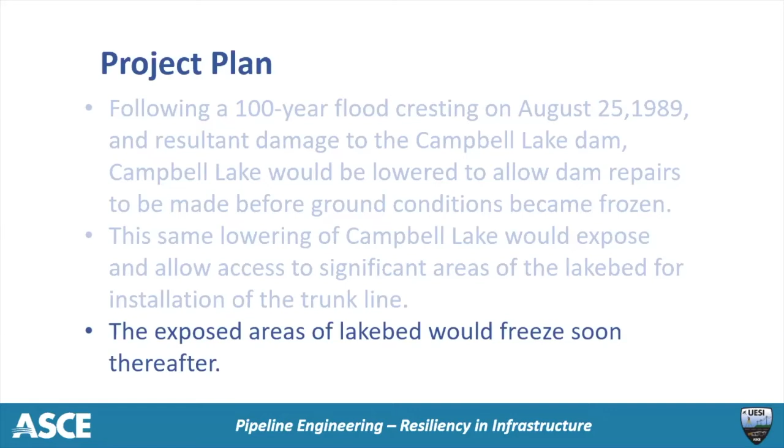That same lowering of Campbell Lake would expose and allow access to significant areas of the lake bed for installation of the gravity sewer trunk line. The exposed areas of the lake bed would soon freeze thereafter. And while that lake bed area was frozen, the route of the trunk line would be trenched to a gravity flow grade. The bottom of the trench would extend to a depth as great as 22 feet below the lake bed. That's important because if this had not occurred, a force main would have had to be built instead of a gravity flow job, a gravity sewer project.

And a force main would have been much more expensive to not only construct, but also to operate in the decades to come. So after the trench is dug to grade, the bottom of the trench would be backfilled with an aggregate base to further stabilize it and further guarantee the proper grade. And then unrestrained 48-inch diameter push-on joint ductile iron pipe wrapped in polyethylene encasement would be installed to grade for the gravity flow trunk line.

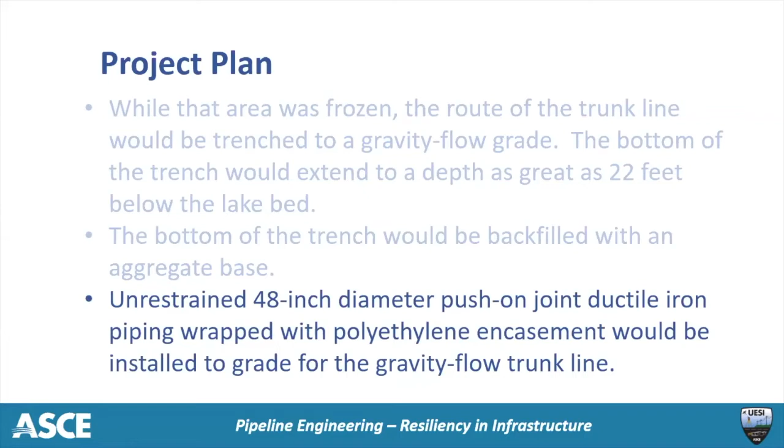That 48-inch diameter unrestrained push-on joint ductile iron pipe would be outfitted with concrete collars atop the pipe to resist buoyant forces. 48-inch diameter ductile iron pipe is going to have 507 pounds per foot of buoyant forces if the pipeline is empty. That's 10,000 pounds per 20-foot length of pipe. Significant buoyant forces inside a partially filled ductile iron pipe under the water.

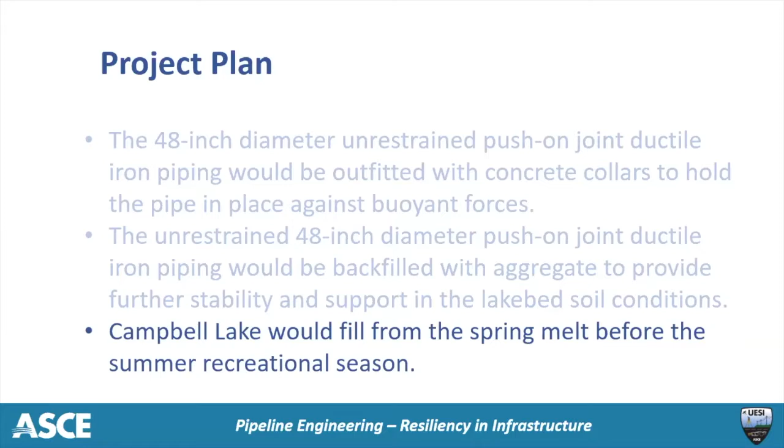The unrestrained 48-inch diameter push-on joint ductile iron pipe would then be backfilled with aggregate to provide further stability and support in the lake bed soil conditions. And then finally, Campbell Lake would fill from the spring melt before the summer recreational season. The job bid on November 1st, 1989. I was there.

I still have my notes from the bid. And it was a real trip down memory lane to dig those out of the file cabinet and be able to help prepare this paper. Beta Construction from Seattle was the low bidder at $3,716,000. The engineer's estimate was $4,900,000. The high bid was $5,434,000. So the engineer was about in the middle of the pack, which is probably where he wants to be.

Fast forward 29 years to November 30th, 2018. A magnitude 7.1 earthquake struck the area. The pipeline laid to grade with concrete collars atop it inside an aggregate-filled trench was disturbed. The concrete collars were shaken off, and the buoyant forces pulled the pipeline up. The greatest deflected joint was deflected 14 degrees. It was also 14 feet above its original grade position, and a 16-inch thick ice layer held it in place

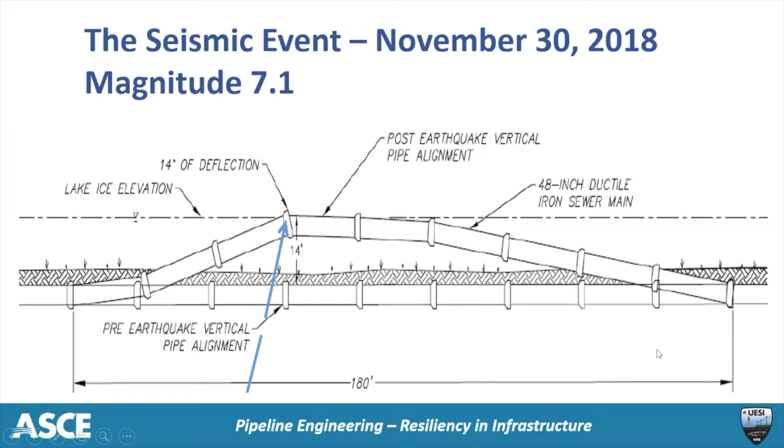undetected. The force main, the gravity sewer line continued to operate, obviously being completely filled upstream and then spilling over that elevated joint. So fast forward 104 days later to March 14th, the ice had melted enough that the buoyant forces allowed the pipeline to push through the ice like a surfacing submarine. And boy, did that get some folks' attention, and they started scrambling.

They quickly put together this strong back assembly, drove it into the lake bed to stabilize the pipe, to hold the joints together so they wouldn't separate when the ice was completely melted. And then they developed plans to further restore the project. And again, that's a presentation by William O'Malley at 12:30 in Track A later today, and I invite you to join in for that.

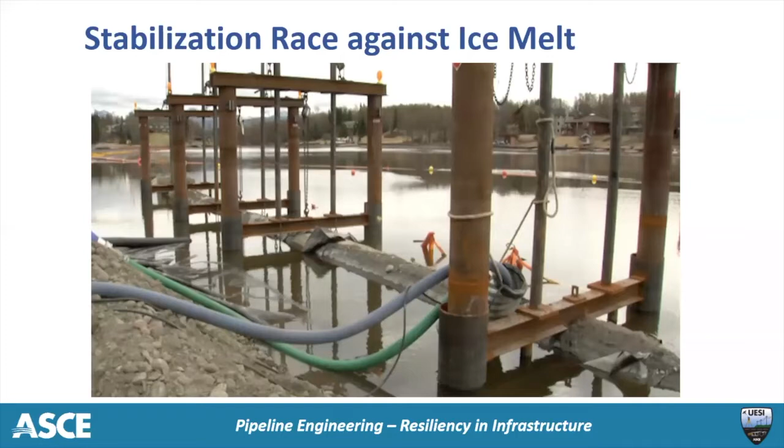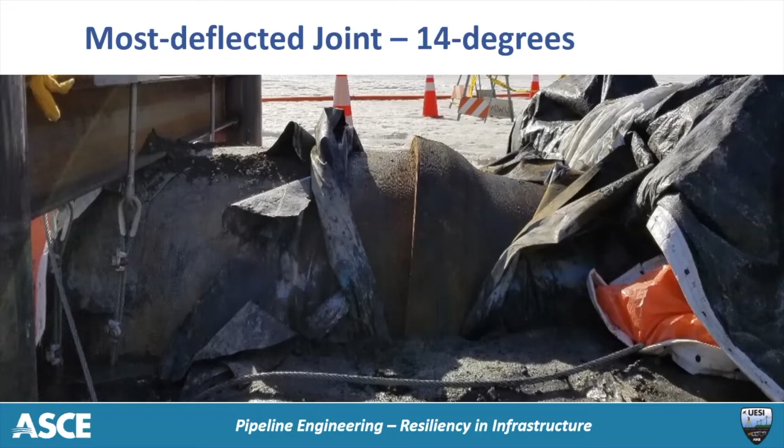Okay, the most deflected joint, 14 degrees. These joints have a 9-inch socket depth. About 6 inches of that spigot is exposed here in this grossly deflected view. You see the loose polyethylene encasement that was pulled back to expose this joint. You see the excellent condition of the pipe surface. This is the American Fastite joint in straight alignment. It's the joint that was used for this project.

The other brand of push-on joints for ductile iron pipe is called Tyton. They both use a dual durometer gasket. In the Fastite brand, that left-hand portion of the gasket is the higher durometer. It's inside a square socket groove that holds the gasket in place, and the wider part to the right, which is thicker and fatter, is the softer durometer, and that's where the bottle-tight, watertight joint is made.

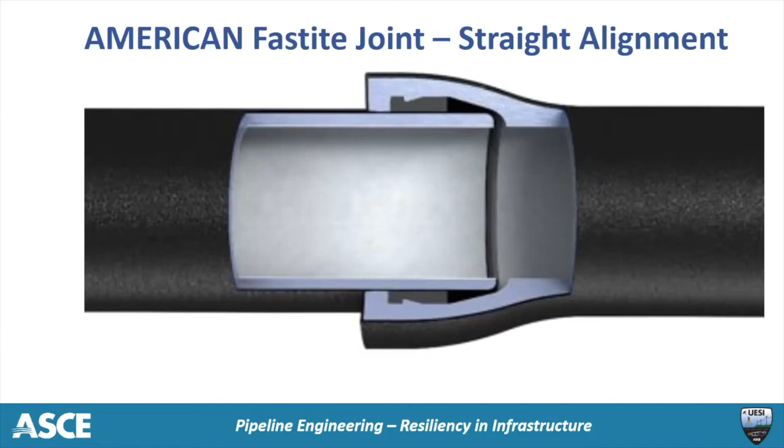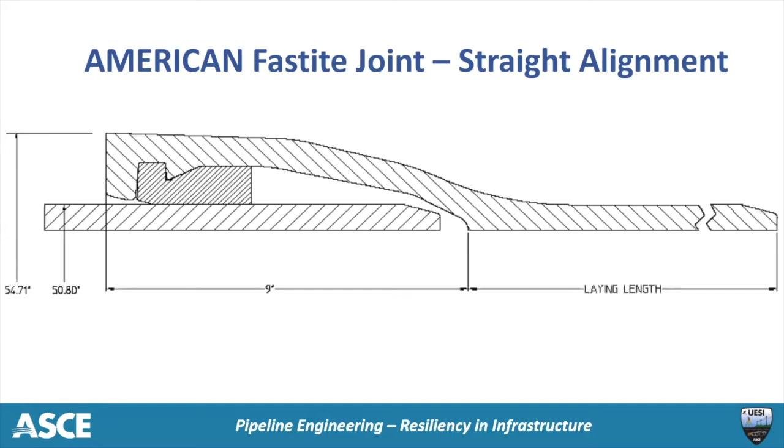This is the special deflection Fastite joint. The regular deflection Fastite joint in 48-inch allows 3 degrees design deflection, 12 inches offset. Because this project is remote, because it would take an awfully long time to ship any specially made joints to the job site, special deflection bells were machined, providing an extra degree of deflection, an additional 5 inches of vertical offset for each 20-foot length of pipe. And this is an engineer's drawing of the 4-degree design deflection.

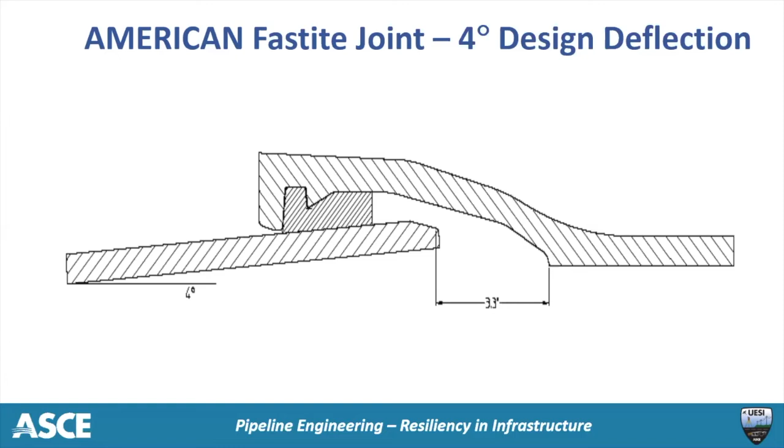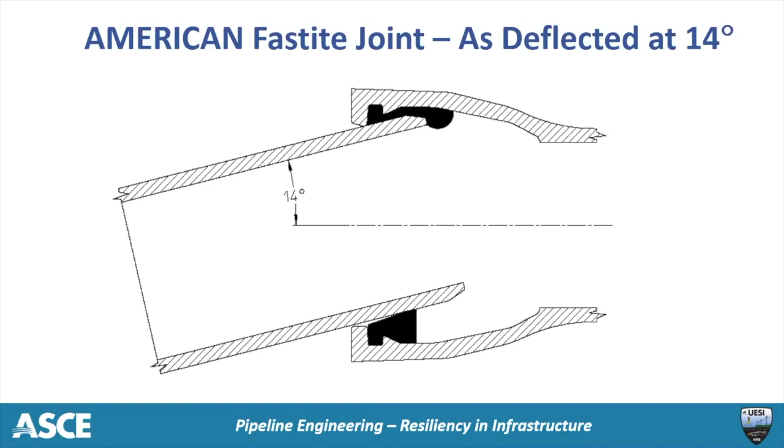This is the 14 degrees as deflected after the earthquake. This reminds me of what an X-ray of an almost broken leg might look like. It can be quite stunning when you first see this and see how much of the spigot has pulled out, and yet the gasket continued to stay in place. The spigot did not fully separate. The joint continued to perform and did not leak.

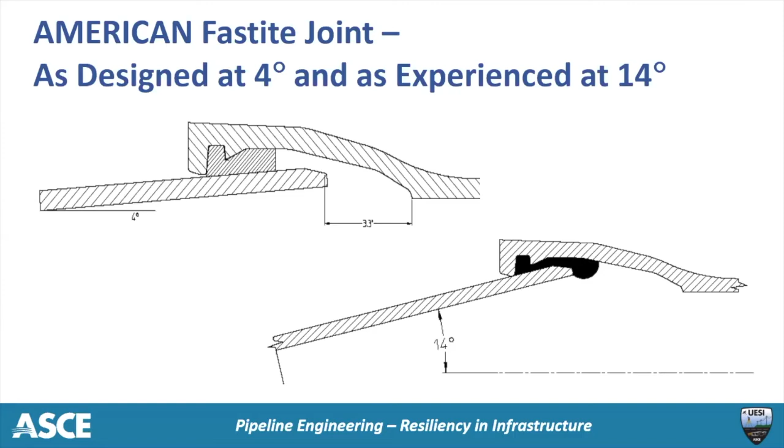This is a side-by-side view showing the 4-degree special deflection bell on the top left and the 14-degree as experienced deflection on the right. A dramatic comparison of resilience of performance outside of design conditions. So let's look here at a little project history.

It's 3,337 miles from Birmingham, Alabama, where this pipe was manufactured, to Anchorage, Alaska. The pipe would move by piggyback trailers loaded on rail cars from Birmingham to Vancouver. Those piggyback trailers would then be transloaded to barges and moved up the Alaska inland passage to Anchorage. And those piggyback trailers would then be offloaded from the barges and trucked to the job site at Campbell Lake. The first shipment was made December 14th, 1989.

The freight cost for the piggyback barge truck combination was a total of $185 per ton. That's $609 per 20-foot length of pipe. That's $30.45 per foot. The delivered pipe price was $110 per foot. So freight was 28% of that total delivered cost.

And at $110 a foot for the 8,432 foot long project, the pipe material cost $927,520, and that's 25% of the $3,716,000 construction cost. Quite a bargain, if I may say so.

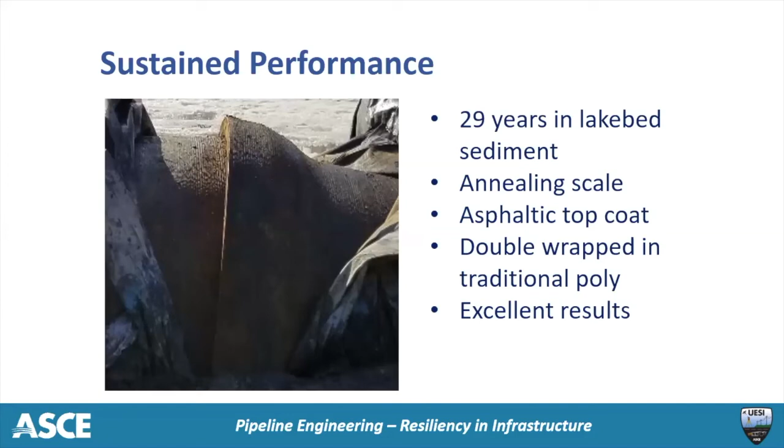So what if this project were designed today? How might it be designed differently? What advancements have occurred in ductile iron pipe technology that might be employed today? I would expect the flex ring joint would be used instead of the unrestrained Fastite joint. That would include the same Fastite gasket with dual durometer and bottle tight sealing.

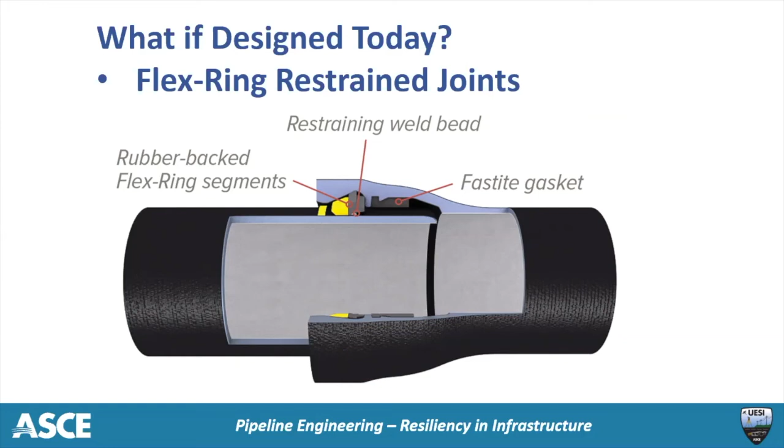It would include a restraining weld bead on the spigot that would engage with a rubber backed assembly with locking segments to prevent joint separation, and it would still allow joint flexibility. This is a remarkable combination of joint performance. An even more remarkable combination of joint performance are seismic joints.

This particular design includes 8 degrees deflection, 3 degrees on the left-hand side of that red casting, and 5 degrees on the right-hand side of that red casting. It includes tremendous end-wise thrust resistance and thrust capacity, yet it also includes longitudinal expansion and contraction, 2.4 inches each expansion or contraction, for a total range of motion of 4.8 inches if you go all one way instead of splitting the difference.

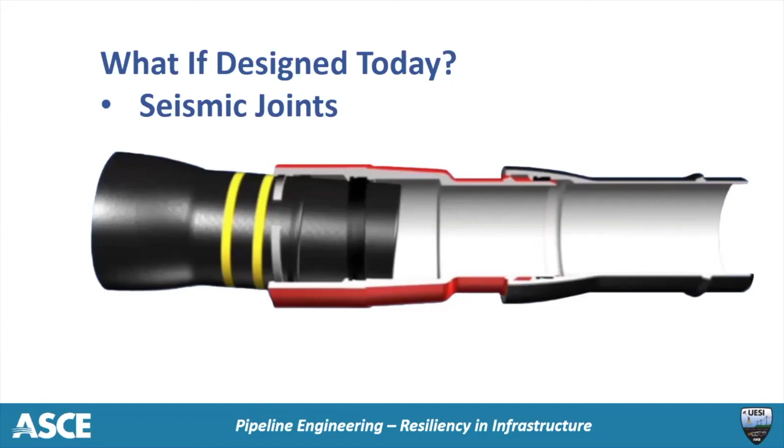I would expect if it were designed today, it would also include zinc coating, and it would probably also include V-Bio enhanced polyethylene encasement instead of traditional polyethylene encasement, which was the only thing available at the time this project was constructed.

Now, I have recently completed a presentation to the NACE Corrosion Conference that studied a zinc-coated V-Bio polyethylene encasement study in the Everglades, and the samples were monitored even after intentional damage to the wrap and the coating, and the extrapolated expected life using those corrosion probes for those samples in North America's most corrosive environment was 1,666 years.

Now, Greg Horn of the Ductile Iron Pipe Research Association, who just dialed my phone a moment ago, and you may have heard it ring, by the way, is presenting later in this conference on the 60-year history of traditional polyethylene encasement.

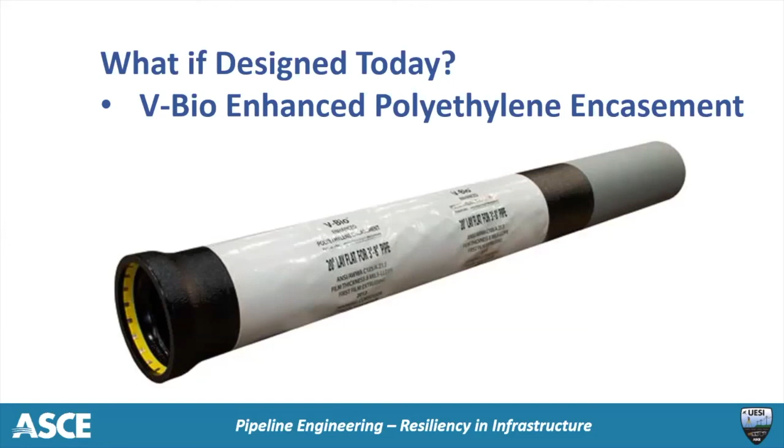Now, the difference in V-Bio and traditional encasement is that V-Bio includes an antimicrobial compound to kill bacteria and germs on the surface of the pipe that can result in some corrosion. It also includes a volatile corrosion inhibitor infused into the inner layer, and we changed the color from black to white.

So if you want to see how this project was reconstructed, I know they reused the pipe. They took some apart and replaced the gaskets, all wise measures, and rebuilt this very soon thereafter. A fascinating presentation by William O'Malley of Anchorage Water and Wastewater later today at 12:30 in Track A.

Now, if you read the written version of this paper, the concluding statement is, the use of ductile iron pipe with its push-on joints and rubber gaskets allowing liberal deflection and its encasement in protective polyethylene 29 years before a potentially catastrophic seismic event made possible survivability and restoration of a critical infrastructure in an environmentally and economically sensitive area. Truly pipeline resilience. So thanks very much, and I'd be happy to take your questions.